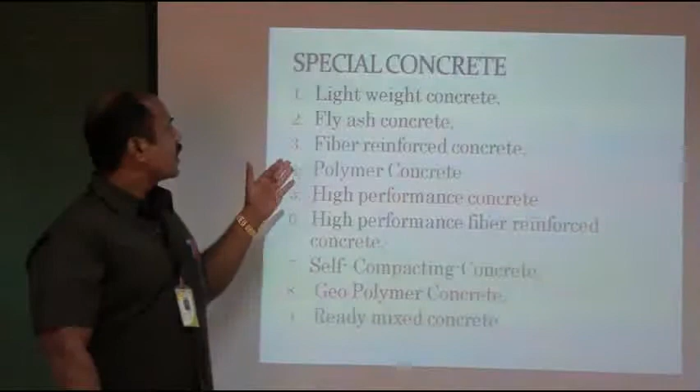For example, lightweight concrete. Second one is fly ash concrete. Third one is fiber reinforced concrete, polymer concrete, high performance concretes, high performance fiber reinforced concretes, self-compacting, geopolymer and ready mix concrete. So we are going to discuss one by one. So first one is lightweight concrete. The word itself is easy to understand.

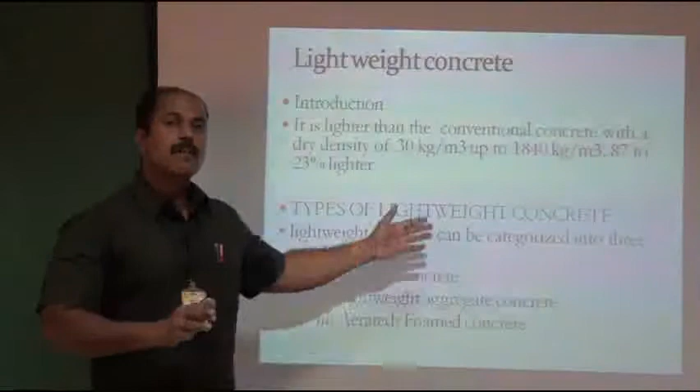How is the weight going to be reduced? There are three methods. First one is no fines concrete, second one is lightweight aggregate concrete, and third one is aerated and foamed concrete. So first one is no fines concrete. No fines means we are going to eliminate the fine aggregate of the concrete.

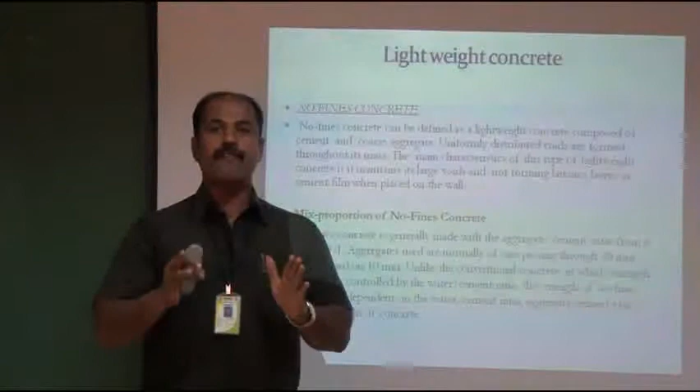Normally concrete is made by mixing coarse aggregate, fine aggregate, cement, fly ash or admixture and water. So we are eliminating the fine aggregate, only mixing coarse aggregate, cement, water with admixture. That is called no fines concrete. You see this example of no fines concrete. You see these honeycombs. There is no fine aggregate in this concrete.

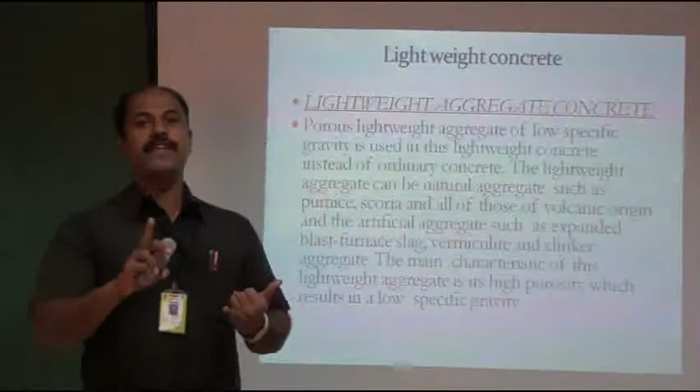So when we pour water, it easily infiltrates. That's the meaning of having no fine aggregate in this type of concrete. This is practically how no fines concrete is made. So in no fines concrete, what are the advantages and disadvantages compared to conventional concrete? First advantage is the self weight of the concrete will be reduced. Second one is the cost of the concrete will be reduced.

And what is the disadvantage? Infiltration. Infiltration means water easily infiltrates into the concrete. So how to avoid this disadvantage? Suppose we are making temporary floors or stages, we make them with no fines concrete. So the second lightweight concrete topic is lightweight aggregate concrete.

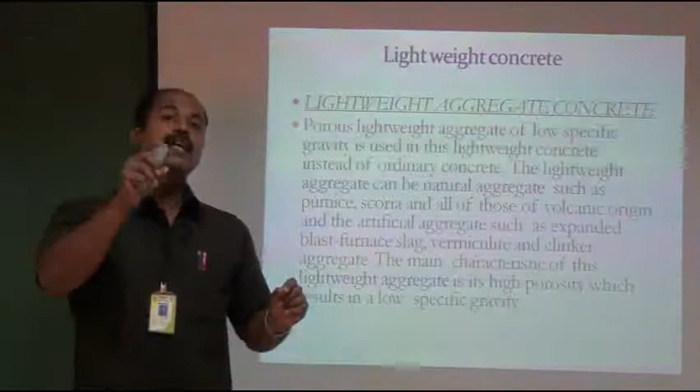Lightweight aggregate concrete means the aggregate we are going to reduce or sometimes replace. So what aggregate is going to be reduced or replaced? Particularly we concentrate on the coarse aggregate. What is the reason we replace or reduce the coarse aggregate? More than 45% of the weight of the concrete is taken by the coarse aggregate. That's why we reduce, replace or change the coarse aggregate.

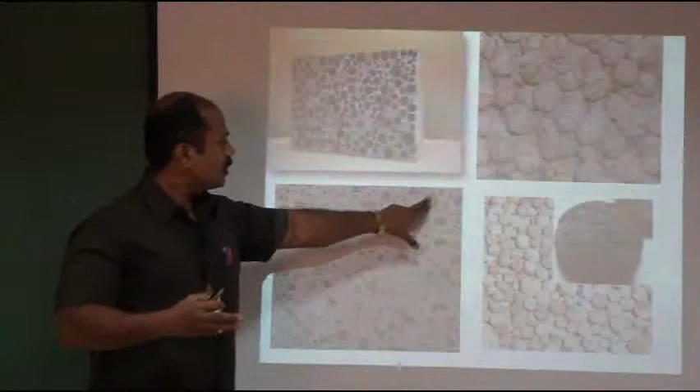In the market there are different coarse aggregates for sale, like thermocol or brick bats. These are the market-available lightweight aggregates, and they are used for making the concrete. If you cut the cross section of the concrete, it is easy to see. These particles are the lightweight particles used to make the concrete.

Third one is aerated concrete. For aerated concrete there are two types of aeration method. First one is induced aeration and second one is creation of the aeration. First we are going to discuss the meaning of creation of the aeration. Creation means to create air bubbles inside the concrete.

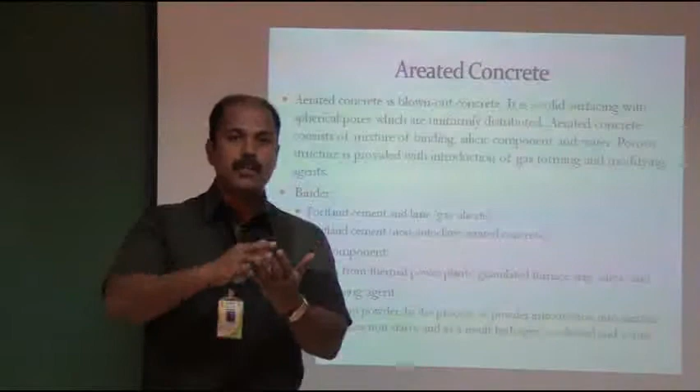How are they going to create them? For example, cement is mixed with aluminum powder. This process of mixing cement and aluminum powder generates air bubbles after 24 hours. You see this honeycomb structure. This is the creation of the air bubbles.

So this is the first step, they are going to cement with aluminum powder. They are going to shape it as required to fill up the mold. After 24 hours they are going to remove it and make the steam cure.

So aerated concrete, it is not possible to make a water cure. That's why we are going to use the steam cure.

So after the setting is over, this is the final structure of the aerated concrete. Another name for this is called floating concrete.

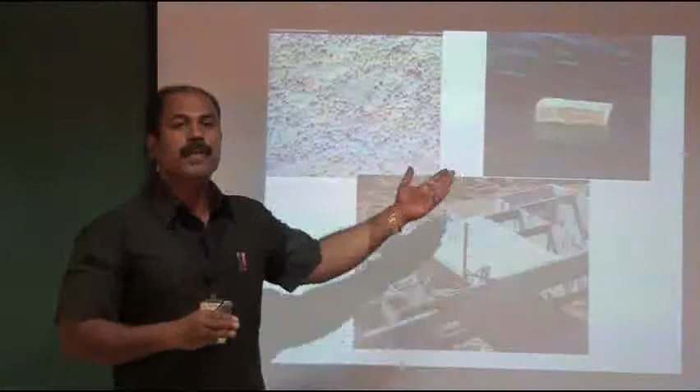What is the reason? The weight of the concrete is reduced by more than 85% compared to conventional concrete, so the weight may be 50 to 100 grams. That's why it's easy for the concrete to float. So the other name for aerated concrete is floating concrete.

So this precast aerated concrete is used for finishing the top structure of the building. For example, they use it for any structure to fill up the top structures.

Second one is foam concrete. Foam concrete means externally the foam is created and mixed with conventional concrete, by eliminating or reducing the coarse aggregate size. This is for the making of foam concrete.

Foam concrete means we are going to mix water and finally get cement and stable foam. The foam is created externally and mixed - this process is called foam concrete.

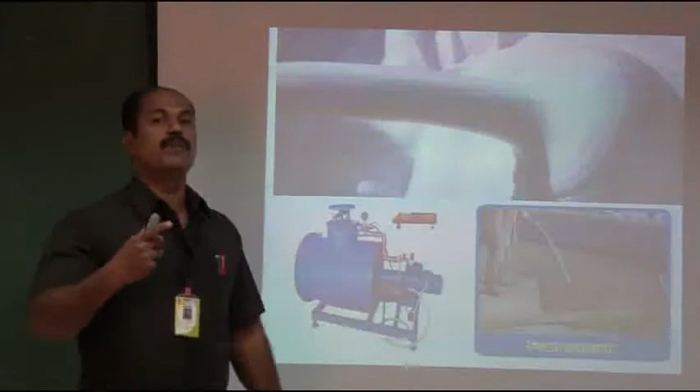So in foam concrete, this equipment generates the foam externally, and the foam is mixed in the mixture machine along with fine aggregate and cement to make the concrete. This is the final stage of foam concrete.

Next is a very important topic of special concrete: fly ash concrete. Already we have discussed lightweight concrete. The second topic is fly ash concrete.

Fly ash is a very important topic in the present scenario. The reason is that fly ash is one of the important environmental impacts throughout the world.

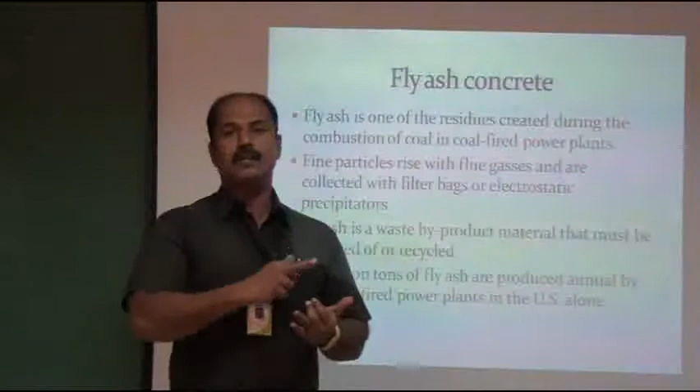So with this fly ash we are going to make concrete. For example, how is fly ash used in different scenarios? The concrete industry uses 46.4% of fly ash for reuse in concrete and cement.

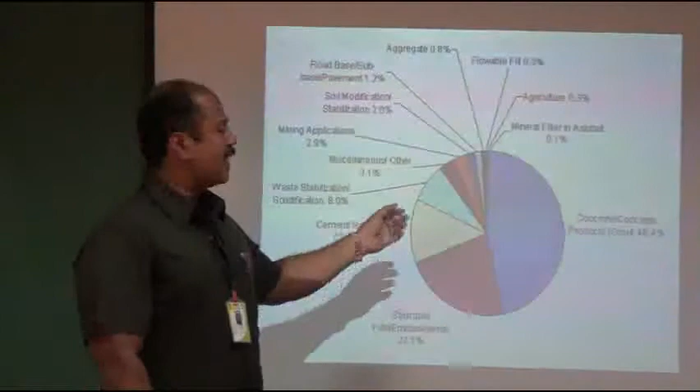Generally fly ash is of two types. What are the two types? Class C type and class F type. What's the meaning of class C and what's the meaning of class F?

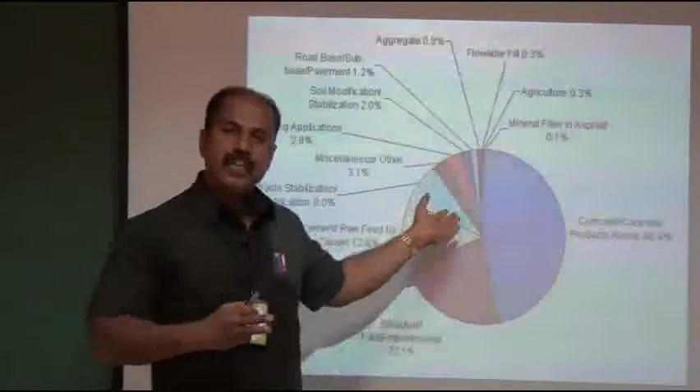Class C means the calcium content of the fly ash is more than 20%. In conventional cement the calcium content reaches 25 to 30%. So in this fly ash the calcium content is around 20%. That type of fly ash is called class C fly ash.

Class F means just the reverse of class C. What's the reverse? The calcium content is less than 20%. In terms of chemical ingredients, the fly ash with calcium content less than 20% is called class F fly ash.

Where are class C and class F available? Class C is available from the coal industry and sub-bituminous coal industry, and class F is available from thermal power stations. Next we are going to discuss how to make it and what ingredients we require for making fly ash concrete.

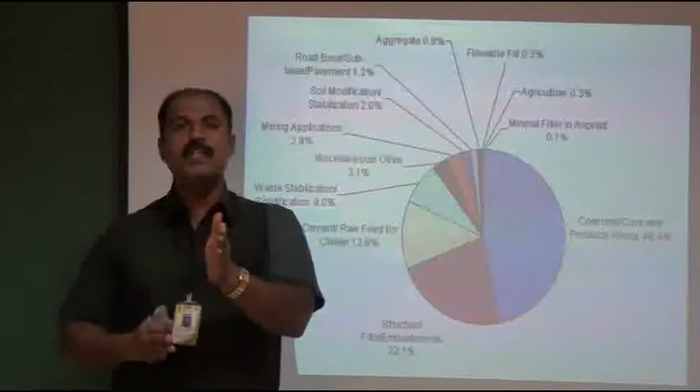So in conventional concrete, we add fly ash in different percentages - it may be a replacement, or it may even be an addition. So with class C and class F, currently up to 30% to 40% replacement of cement is possible for making the concrete.

So what is the advantage of fly ash concrete? First is that it is environmentally friendly. The reason is that fly ash is a disposable material used for landfill.

Normally all fly ash is used to fill up land. So we are avoiding this landfill by using it to make concrete instead. The second advantage is the cost of the concrete - the cost will be reduced by 10 to 20% compared to conventional concrete.

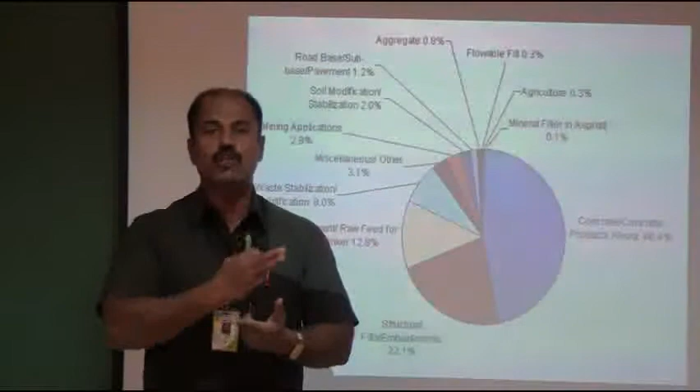The third important point is strength behavior and durability behavior. Strength and durability is higher than conventional concrete. The reason is that fly ash has more silicon content. The SiO2 content is nearly 60 to 80%.

That's why the strength and durability behavior is higher than conventional concrete. You can see how much fly ash is landfilled, and how enormous the amount of fly ash produced per day is for one industry. Think about how much fly ash is produced throughout the world.

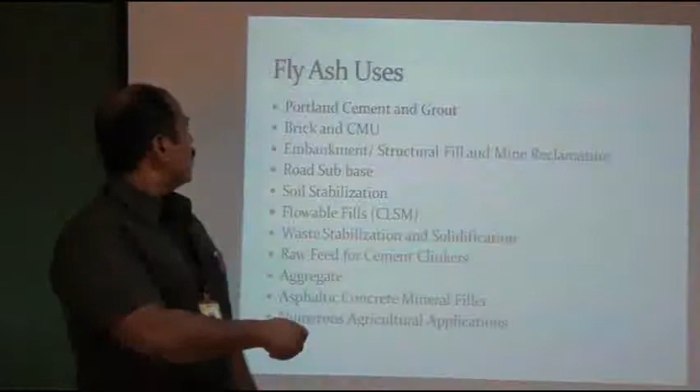So how do we compare class C and class F fly ash? Which one is better? For initial strength, class C is better than class F. This is because in class C, the calcium content is more than 20%.

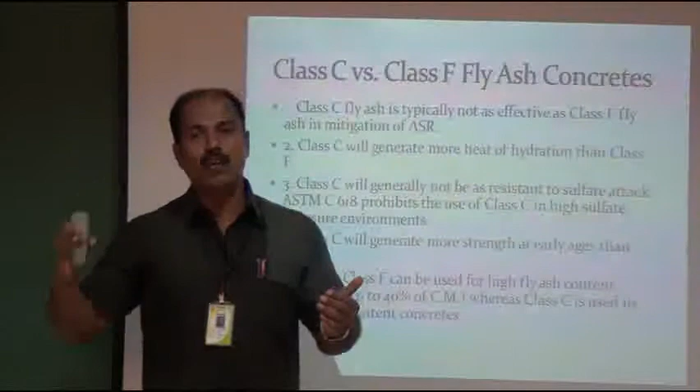But for longer duration strength and durability properties, class F is better than class C. Generally, class F fly ash is used for high volume fly ash, and class C fly ash is used for low volume fly ash. For environmental friendliness, it is normally recommended to use class F fly ash.

So the next important topic is self-compacting concrete. Self-compacting means the concrete automatically flows and compacts itself into congested areas of reinforcement, such as column joint reinforcement areas.

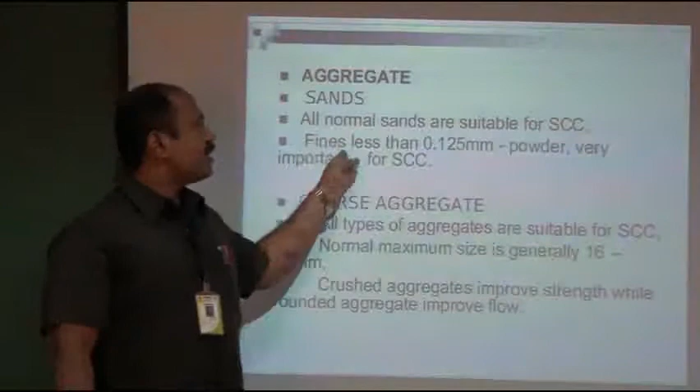What are the ingredients used for self-compacting concrete? Fineness of cement, coarse aggregate, fine aggregate, and then two types of admixtures are used: filling ability and viscosity enhancing agents. These two admixtures are used in mixing the concrete to make it self-compacting.

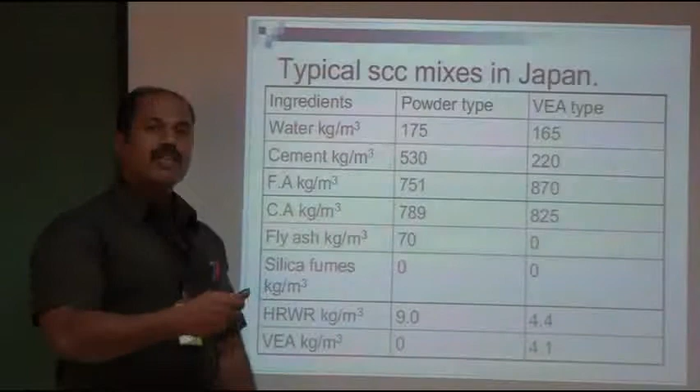There are two methods of making self-compacting concrete: the first is powder type, the second is VEA type, viscosity enhancing agent type. In this method, water is taken at 175 to 165 and cement at 530 to 220. In the VEA method, the cement content is reduced from 530 to 220.

For lightweight concrete, conventional testing methods are used, such as compressive strength, split tensile strength, and workability slump test. But for self-compacting concrete, the measurement of workability is entirely different, using slump flow test with T50 centimeters, J ring, V funnel, L box, V box, and fill box methods.

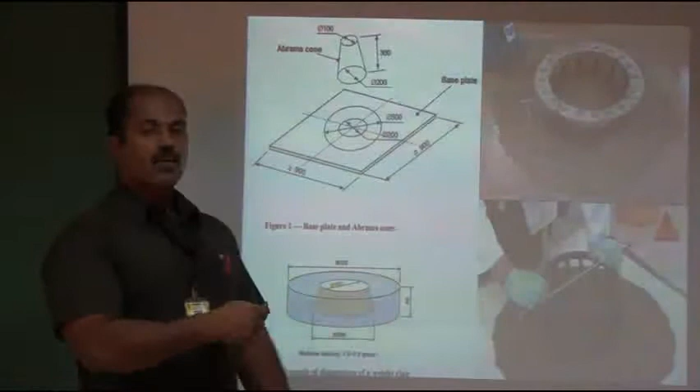The first method is measuring workability using T50. This involves filling the concrete and then removing it to see how it spreads out, measuring the spreading diameter, which indicates the workability.

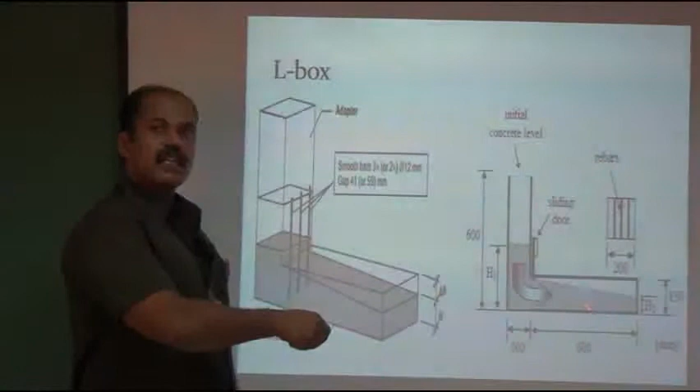The next method is the V funnel method, another way of measuring workability. Concrete is simply filled into the V funnel, and after filling is complete, the bottom screen is removed to observe how it flows.

The next method is the U box method, which is similar to the L box and V funnel methods. The concrete is filled in one section where a screen is provided.

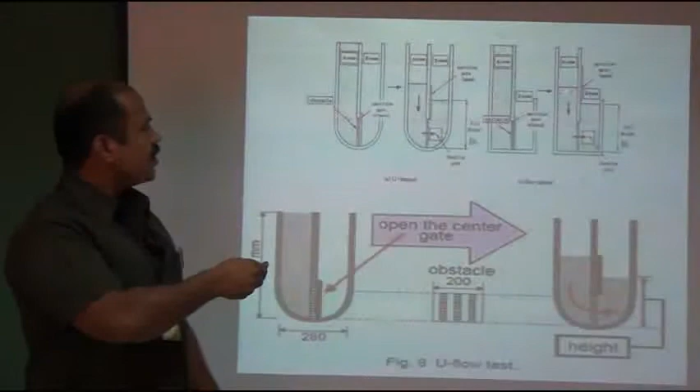So in practical, we are going to discuss 4 types of concrete. The first one is fly ash concrete, here is conventional concrete, and here is self-compacting concrete, and here is foam concrete. So it's easy to identify these in practical - fly ash, conventional, self-compacting concrete and foam concrete.

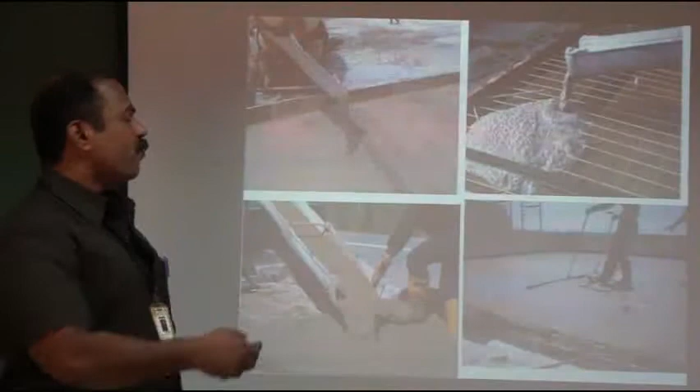So next, what are the testing methods already discussed. And what are the advantages of self-compacting concrete? Faster construction, reduction in site manpower, better surface finishes, easier placing, improved durability, and greater freedom to design - there is no particular design for making self-compacting concrete. That's why it's a greater freedom to design, and thinner concrete sections are possible because it's easy flowing into thinner members. That's why they can make thinner concrete sections and reduce the noise level, because without vibration we can finish the concrete without honeycombing.

So safer working environment. So the next important topic is geopolymer concrete. Geopolymer is the polymerization of conventional concrete to make the concrete.

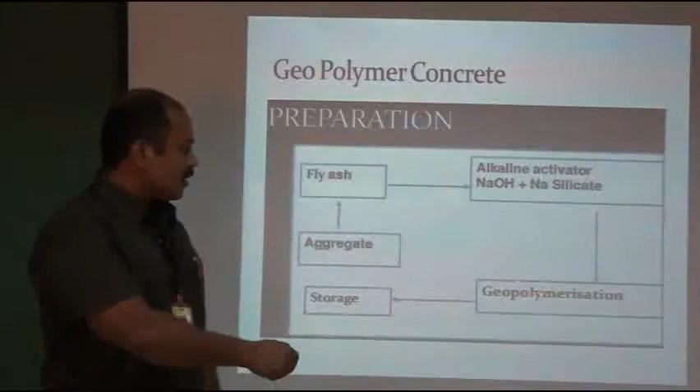What is the meaning of polymerization? First, the mixing procedure for polymerization: fly ash, aggregate, and then alkaline activator of NaOH and Na silicate, and geopolymer. This is the polymerization - we'll discuss later the meaning of polymerization. So this is the mixing procedure. In conventional concrete, we are not mixing NaOH and Na silicate. That is the difference between geopolymer and conventional concrete.

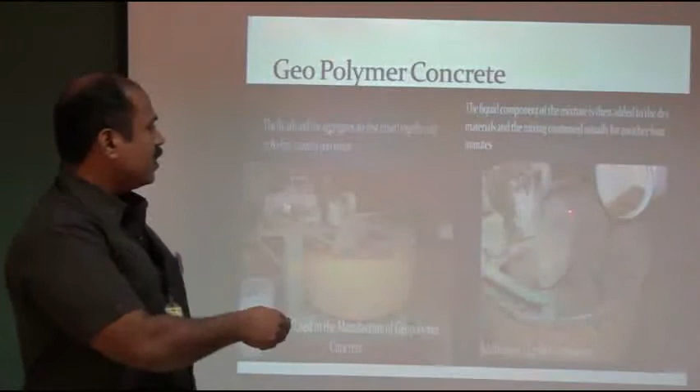For mixing geopolymer concrete: first water, second sand, gravel, KOH and NaOH. So which one is better? We are going to take any one of NaOH or KOH, and other materials like fly ash, silica fume and sodium silicate for the geopolymer. They are going to mix any one of these to make the concrete. So the mixing procedure: first water content, fine aggregate, coarse aggregate, NaOH and fly ash are mixed, and finally KOH is mixed.

The final step gives geopolymerization. After the geopolymerization, the concrete will get this nature. Check the slump - it's very good compared to conventional concrete. This is the making of the concrete. What's the advantage of geopolymer over conventional concrete? Before every special concrete, we discuss the difference between conventional and special concrete.

The geopolymer concrete is high strength concrete - we can achieve 110 MPa in 28 days. But in conventional concrete, as per the mix design, we reach only 40 or 50 MPa. This is very high strength concrete and its durability properties are much higher than conventional. What is the main disadvantage of geopolymer versus conventional concrete? The rate of the concrete - the chemicals, the availability of chemicals is higher cost than conventional concrete. That's the main disadvantage of geopolymer.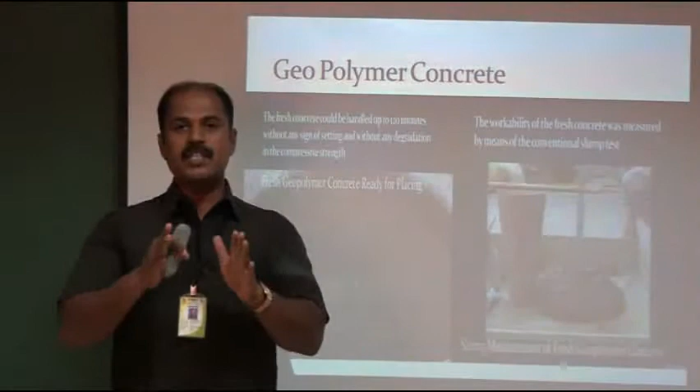Second, the polymerization - we make the mixing and polymerization, and only then can we fill up the concrete wherever required. But in conventional concrete, there's no need for polymerization. That's the main difference between geopolymer and conventional concrete.

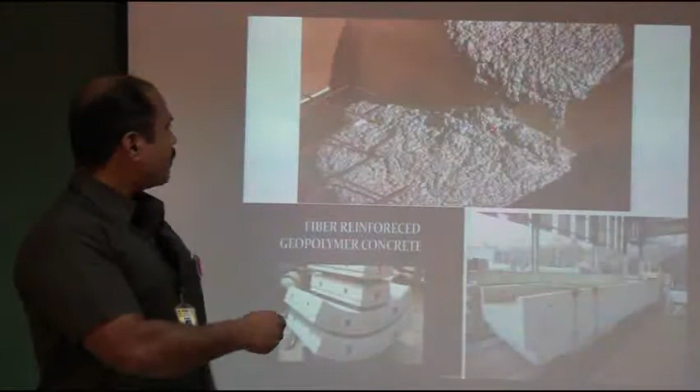These are the advantages - the compressive strength is about 1.5 times more than conventional concrete. This is the fresh geopolymer concrete, and after geopolymer we make precast elements like channel sections, railway sleepers, and electrical posts. These are the precast elements we make with geopolymer concrete.

So next one is fiber reinforcement concrete - another special type of concrete. Fiber reinforcement concrete means we are mixing some minute fibers into conventional concrete. That's the meaning of fiber reinforcement. So what's the need for fiber reinforcement? Normally concrete is very good in compressive strength but very weak in tensile strength. So some minute cracks will form after setting, during the plastic stage - reaching the plastic stage, some minute cracks will be formed.

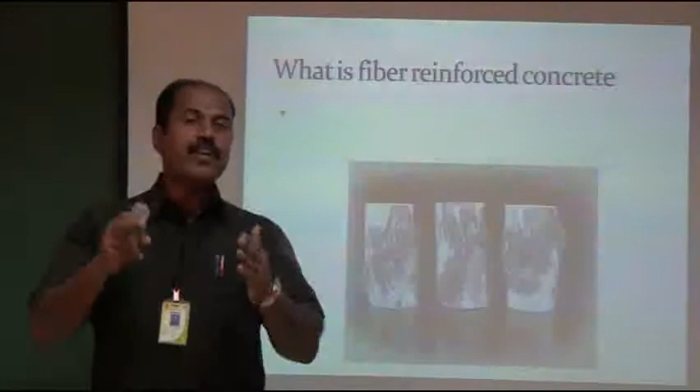So how to avoid this minute cracking? By mixing in some fibers. In the market there are different types of fibers available. You see this one: glass fibers, wood fibers, natural mineral fibers, asbestos fibers, cotton fibers, bamboo fibers and bituminous fibers. So there are different types of fibers available.

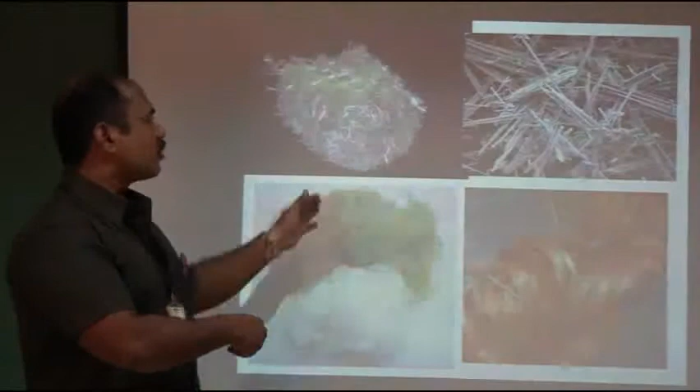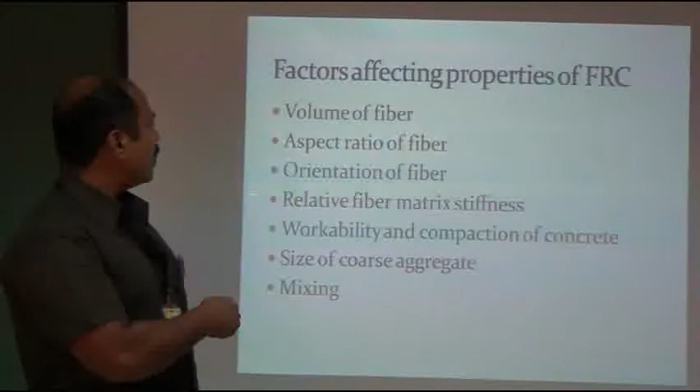Next, the important factors for the properties of fiber reinforced concrete: volume of fiber, aspect ratio of the fiber, orientation, relative fiber matrix, workability, size of coarse aggregate and mixing. These are the properties affecting your fiber reinforcement. First one is the volume of fiber. Suppose we mix fiber in concrete, how much volume do we need? Suppose we add 2 kg, 3 kg, it is very difficult for the workability characteristics. That's why they recommend 0.2 to 0.35% of total volume of the concrete for mixing. That avoids honeycombing, segregation and bleeding of the concrete.

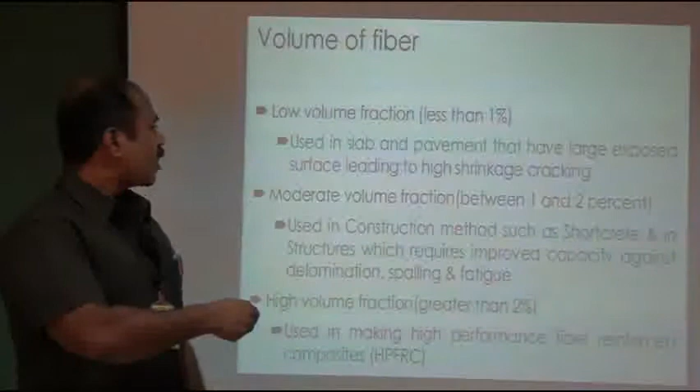So see this one: low volume fiber fraction means less than 1%, moderate means 1 to 2%, and high volume means greater than 2%. It should not be more than 5%. The reason is that beyond this 5% limit it affects the workability characteristics.

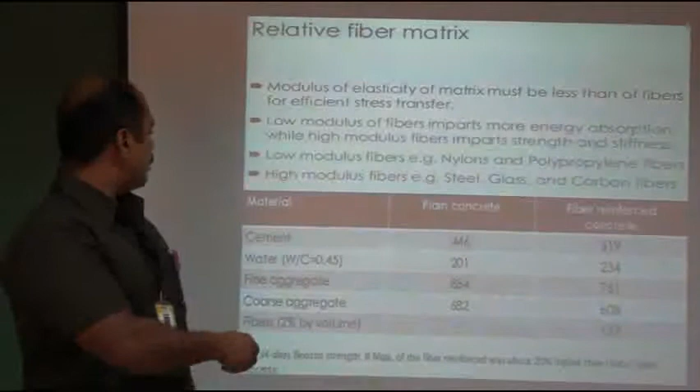Next is relative fiber matrix for the cement content. We take 519 for fiber reinforced concrete and 446 kg per m cube for plain concrete. Those are the ingredients for making fiber reinforced concrete and plain concrete. For water cement ratio they take 0.45. In fiber reinforced concrete they take 234. That is the difference between plain concrete and fiber reinforced concrete.

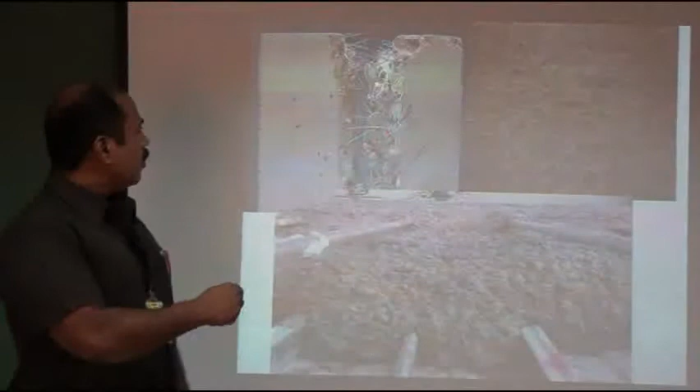So see this one, how the fiber is mixed in the concrete. After breaking the concrete, how the fiber is spread uniformly throughout the concrete. You see the surface of the concrete with fibers in the plastic, fresh stage, how the fibers are oriented. The orientation of fiber is very important for the tensile characteristic. Suppose all fibers are in horizontal position, the tensile characteristic is higher than conventional concrete. So orientation of fiber is another important characteristic for making fiber reinforced concrete.

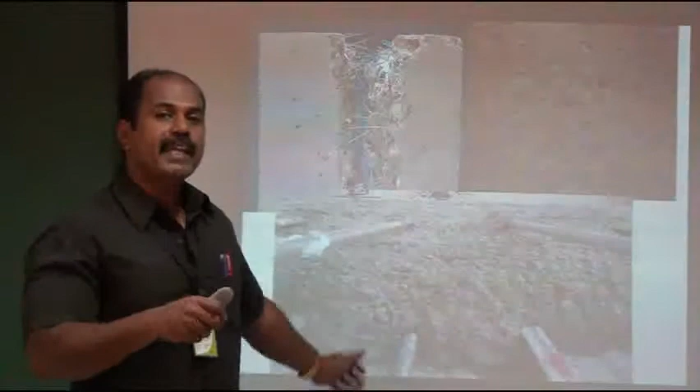So next one is high performance concrete. High performance concrete is used nowadays for bridge structures, slabs, and huge structures where the span length is more than 30 meters or 50 meters. We recommend high performance concrete for these.

What is the meaning of high performance? How does it differ from conventional concrete? High performance concrete means performance. Which performance? Workability, strength and durability. Concrete that improves in these three performances is called high performance concrete.

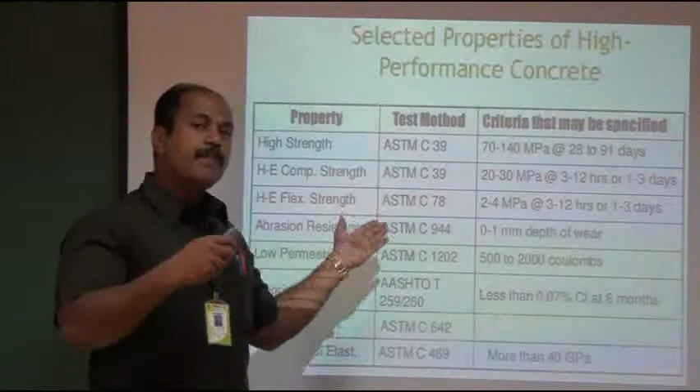So what is the strength behavior of high performance concrete? We get 70 to 140 MPa at 28 days to 91 days. In conventional concrete, it is not possible to reach this much strength. In conventional concrete, 70 is maximum, but high performance concrete reaches up to 140. That is the main difference between conventional and high performance concrete.

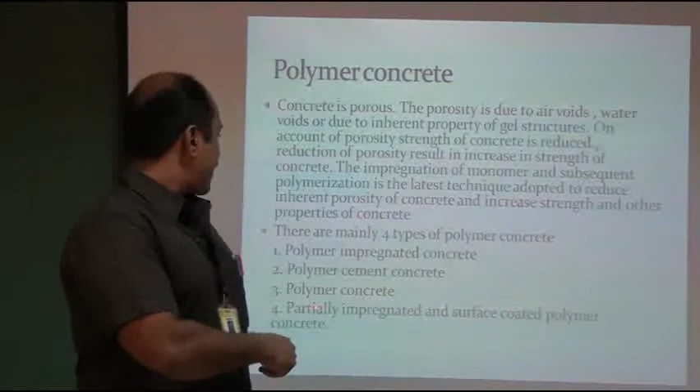Next one is important, polymer concrete. Before we discuss polymer concrete, note how geopolymer and polymer differ. There are four types of polymer concrete. First one is polymer impregnated concrete. Second one is polymer cement concrete. Third one is polymer concrete. And fourth one is partially impregnated and surface coated polymer concrete. So we are going to discuss them one by one.

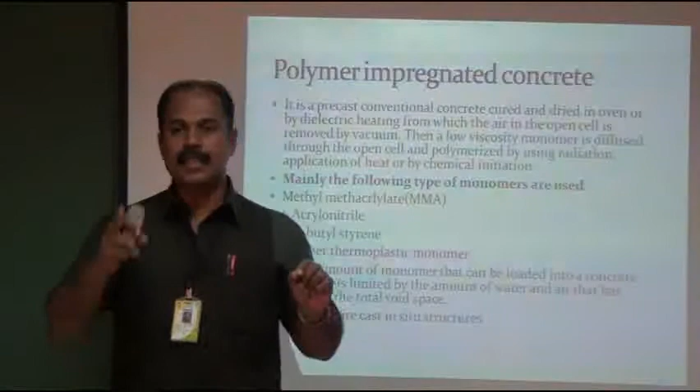How? The polymer acts as a fill-up agent, infiltrating the cracks. Suppose there are cracks or honeycombs on the surface of the concrete; the polymer fills them up to increase the strength. That is called polymer impregnated concrete. You see this one, this is polymer impregnated concrete. And next one is polymer cement concrete.

Polymer cement concrete means cement concrete, as we know, with polymer mixed in extra to the conventional concrete. What is the extra? Different types of polymers: polyester styrene, epoxy styrene and furan. These polymers are available in the market and are mixed into conventional concrete. What is the percentage? As per the design, 2 to 3% polymer is mixed into conventional concrete, and it is placed in the required shape. That is called polymer cement concrete.

So this is polymer cement concrete. After placing the polymer cement concrete, they check the fineness and surface area, which differ from the conventional one.

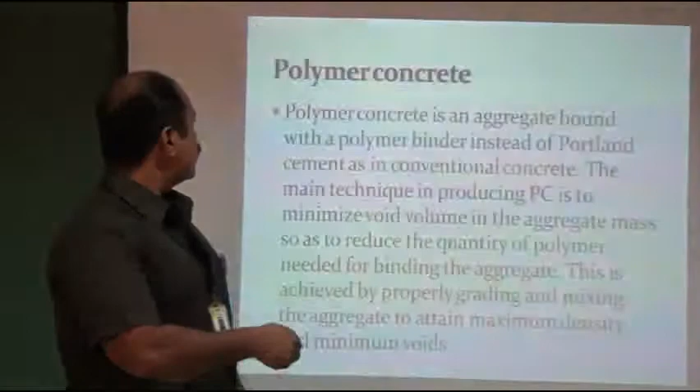Next one is polymer concrete. Polymer concrete means there is no cement. Polymer is the binding agent. Polymer, coarse aggregate, fine aggregate and water are mixed to make the concrete. In polymer cement concrete, cement is mixed and polymer is added extra to conventional concrete. But polymer concrete needs no cement; polymer is the binding agent for the coarse and fine aggregate. So this is polymer concrete.

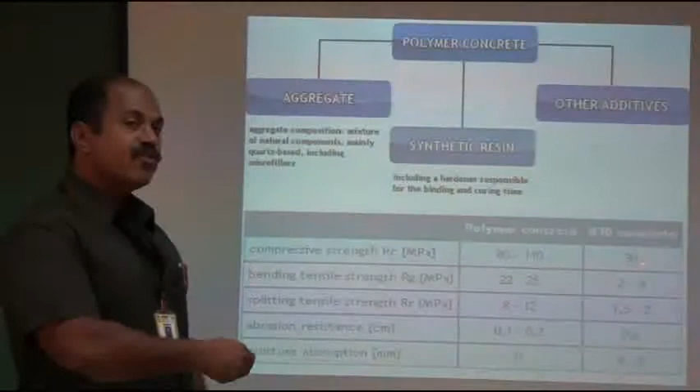What is the compressive strength? This is a very important one. For polymer concrete we get 80 to 110 MPa, but in conventional concrete of M30 grade we achieve only 30. How do they differ, 80 versus 30? That's the main advantage of polymer concrete over conventional concrete.

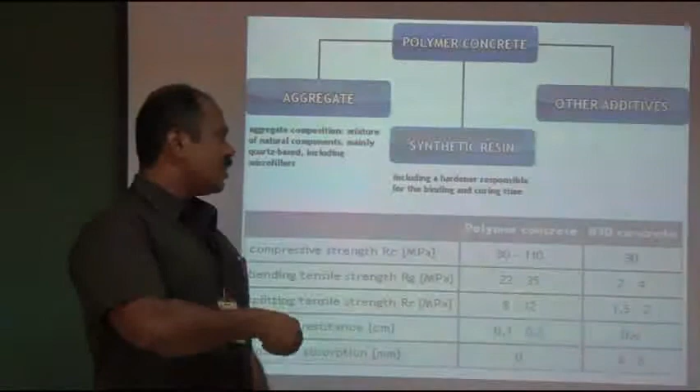So this is the main advantage and comparison of your conventional to your polymer concretes. So this is for the polymerization. Polymerization means which concrete is a polymer concrete. Polymer concrete means coarse aggregate, fine aggregate and polymer mixed to make the concrete.

Here for the surface coated. Next one is polymer impregnated and surface coated. Impregnated means they are going to immerse in the polymer solution. After the immersion, they are going to apply the polymer on the surface. Two processes are involved for the polymer impregnated and surface coated concretes. So this is how they are going to surface coat.

After the concrete is over, spraying of the polymer on the surface, the entire surface, to fill up with polymer. Here the beam section, they are going to apply the brush for the surface coating of the concrete. Here for the structure, they are going to spread the polymers. So this is practically how to apply and surface coat your polymer sections. So this entire structure they are using for the polymer structure.

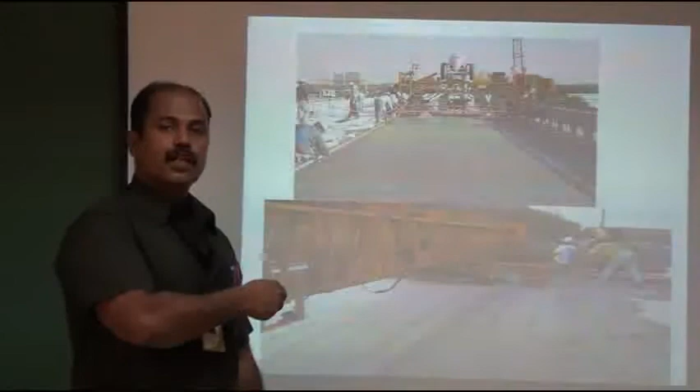Here practically they are going to use it for the road pavement. For pavement roads they are going to use the polymer cement concrete. This is the finishing structure of the polymer cement concretes, and this entire structure they are going to use the polymer sheet. Afterwards we are going to see what are the tests available.

So before, we discussed special concrete. So what's the meaning of special concrete? What's the difference between conventional concrete and special concrete? How do they differ from your conventional characteristics? Everything we discussed. So in general, what are the tests available for the properties of your concrete? Maybe strength properties or fresh concrete properties or hardened concrete properties.

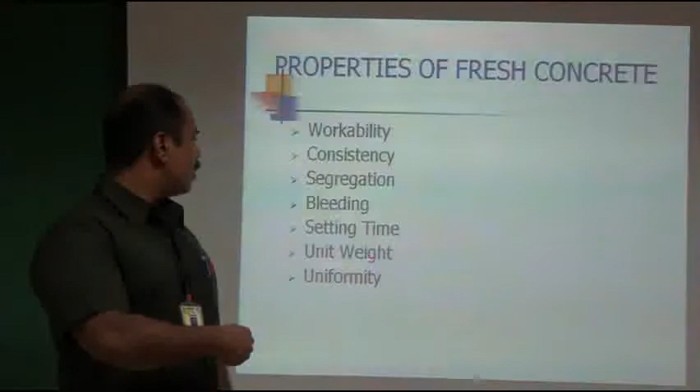So there are two stages of concrete that we generally know: the fresh concrete stage and the hardened concrete stage. So what are the properties of your fresh concrete? First one is workability, second one is consistency, third one is segregation, bleeding, setting time, unit weight and uniformity. These are the properties to check for your fresh concrete stage. In hardened concrete we are going to check the strength behaviour, corrosion behaviour, durability behaviour and some other properties.

So first, in the property of your fresh concrete, we are going to check the concrete consistency. Concrete consistency means we are checking the workability of the concrete using the different methods of workability testing. So first one is slump cone test. Practically for all types of concrete we check the slump measurement. Other tests available are compaction factor, flow table, VB consistometer, Kelly ball test, and VB impression testing machine. So there are different types of measurement available.

The slump cone is generally used practically in all types of sites for checking the concrete. Suppose in special concrete, like fiber reinforced concrete, we are checking the workability, it is not possible to check your slump. So in fiber reinforced concrete we check with the VB consistometer and flow table, which are suitable for your special concrete. Suppose your compaction factor is more than 0.9, it means very good compaction. Less than 0.9 is medium or low. That is the Indian standard recommendation of the compaction factor test.

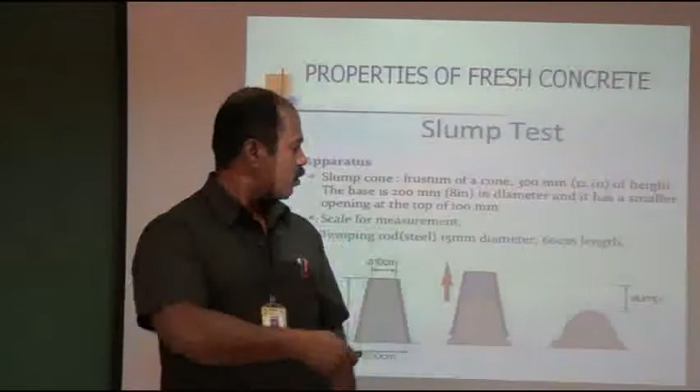So first one is the slump cone. Generally we know this slump cone. Height is 30 cm, top diameter is 10 cm and bottom diameter is 20 cm. Fill up the concrete in 3 stages. In the first stage, fill up with uniform compaction of 25 blows. Then we fill the second and third. After the fill up is over, gently remove the cone upwards. When you remove it upwards, your concrete spreads according to the nature of your water content mixing.

So your original height is 30 cm. The difference between the height of your concrete and the original height is the slump value of your concrete. So you see this one, there are 3 types of slump: collapse, shear and true slump. Naturally for all slump we consider these 3 types of slump.

So collapse in conventional concrete means the water ratio is more than 0.5, so it is going to collapse. Collapse means the entire spreading of your flow. That is for the collapse. Shear means it goes to one side, the concrete slides. That is called the shear failure of the concrete. Here, the true slump is your original height to your concrete height. That is the original slump of the concrete.

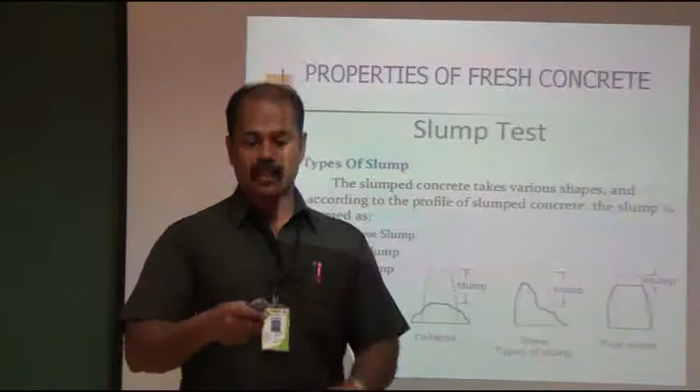So this is the slump value as per the Indian standards. Very low slump is the range of 0 to 25 mm, for a compaction factor of 0.78. Low slump is 25 to 50, medium slump is 50 to 100, and high slump is 100 to 175. That is the cone height to the final height of your concrete. That is called the slump of the concrete.

So next one is the flow test. Flow test means flow table. On the flow table, before placing the concrete, we measure the spreading diameter in different directions. After filling, they remove the flow cone and jolt it 15 times, so the concrete spreads uniformly throughout the table, then measure the diameter. The diameter minus 25 divided by 25 gives the flow percentage. That is the flow test.

So next one is the flow test formula: the diameter of the flow minus 25, divided by 25, into 100. What is the measure of your consistency? Flow percentage 0 to 20 means dry, 20 to 60 means stiff, and 60 to 100 means plastic, wet and sloppy. Sloppy means more than 120 to 150. That is the special concrete, self-compacting concrete. You get 120 to 150 for it.

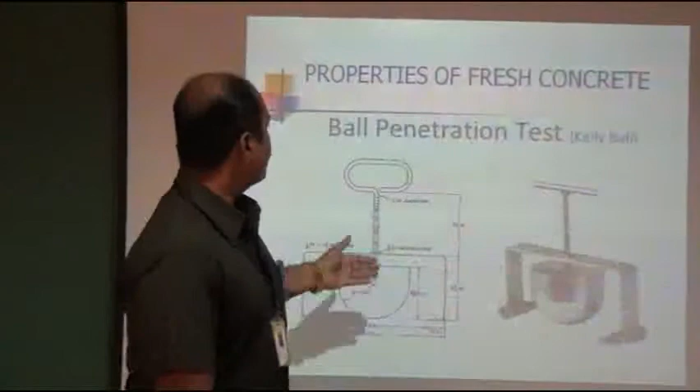So next one is the Kelly ball test. This is another test method to measure the workability of the concrete. Next one is the ball penetration test. In the ball penetration test, they simply penetrate the fresh concrete. Suppose the concrete is placed in a slab. They press the ball into the surface of the concrete. How does it penetrate? How much depth does it penetrate? According to the depth of penetration, they measure the workability of the concrete.

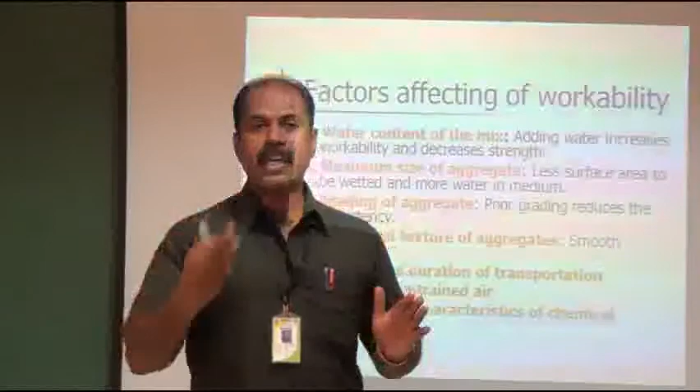So what are the factors affecting the workability of the concrete? First is the water content of the mix. Second is maximum size of aggregate, grading of aggregate, shape and texture of aggregate, method and duration of transport, amount of entrained air, and quantity and characteristics of chemical admixtures. First one is water content. That is a very important characteristic governing workability. More water content means the spreading diameter is more. But strength behaves inversely to water content: more water means strength will reduce.

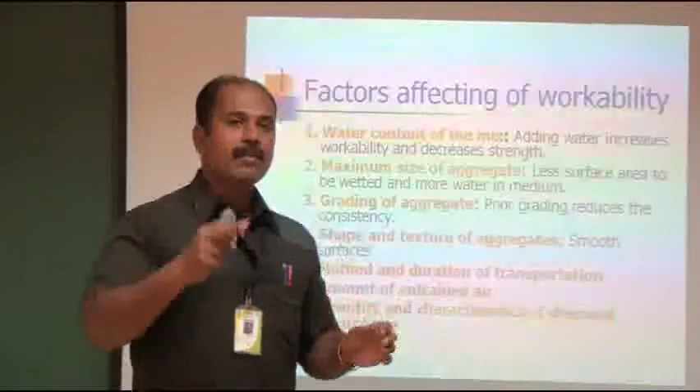Second one is maximum size of aggregate. If the size of aggregate is more than 25, the workability will be affected. The size of aggregate good for workability and strength is the range of 12 to 20 mm. 12 mm to 20 mm is suitable for high strength concrete and good workability. Next one is grading of the aggregate, which means separating the sizes of aggregate. Suppose maximum is 20 mm and minimum is 10 mm; grading means we split into 10 mm, 12 mm and 20 mm. This grading is very good for workability.

Next one is shape and texture. That's an important characteristic of workability. The shape of the aggregate affects the workability. Which shape? Rounded aggregate is more workable compared to irregular and angular aggregate. Angular aggregate is less workable, but in strength, rounded is lesser than angular aggregate. That is the strength behavior.

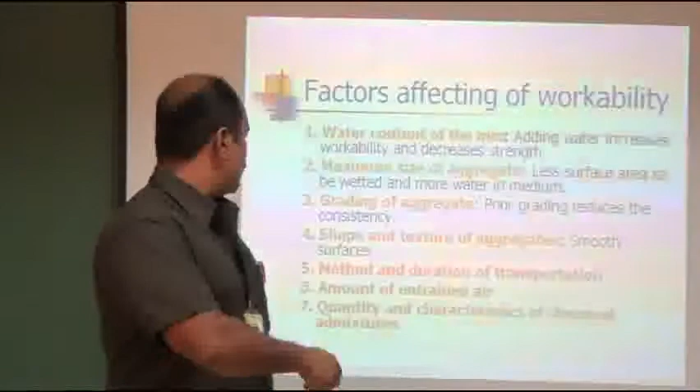Next one is method and duration of transport. That affects segregation and bleeding of the concrete. Suppose the concrete is made in one place and placed some distance away, beyond 100 to 200 meters, transported from mixing to placing. The concrete is automatically jolted, and segregation and bleeding occur easily. That's why the method and duration of transport is very important. So next one is measurement of workability by the compaction factor, the next method for workability.

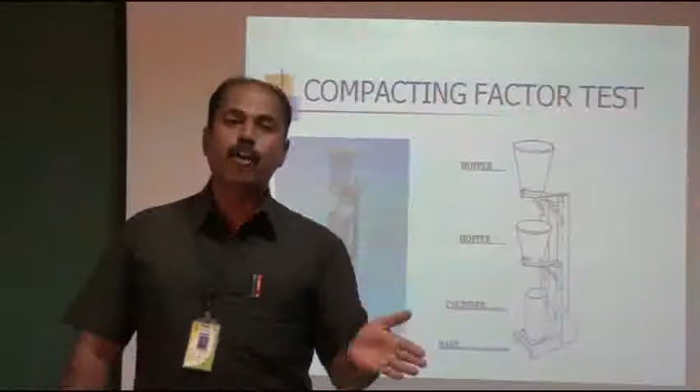First one is the slump method. Second one is the flow table method, and third one is compaction factor. In compaction factor, there are two hoppers. Fill up this hopper entirely in 3 stages to the top surface, open the bottom door freely to fill up the second hopper, and then open here to fill up your mold. Then we take the weight. Level it and weigh it; that is called the partial compaction of the concrete.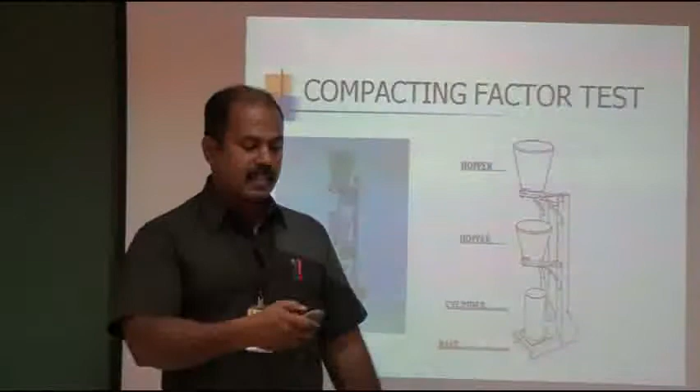Second stage, fill this cone with concrete in 3 stages. First stage, fill up the concrete up to this level and give 25 blows. Second, here give 25 blows, and at the top fill up the concrete and do the same. The weight difference between partial compaction and full compaction measures the compaction factor of the concrete. So this is the testing procedure for the compaction factor of the concrete.

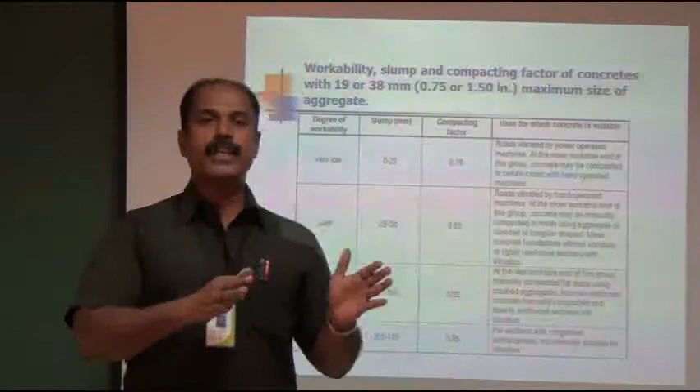How they test it from the first hopper to the second hopper, and here is, as per the Indian standard, what value is required for the compaction factor. Very low means 0.78, low compaction factor is 0.85, medium is 0.92, and high compaction factor is 0.95. It is very useful for measuring and making your mix design. Suppose M20 grade, M30 grade, M35 grade mix design, we need the compaction factor value.

Here is the Vee-Bee consistometer, another method of testing the workability of the concrete. This method is suitable for some special concretes, for example fiber reinforced concrete. So this is the Vee-Bee consistometer. It is the same method as the slump cone. Place the slump cone in this Vee-Bee equipment and fill the concrete in 3 stages, each stage 25 blows of the tamping rod, and finish the top level of the concrete.

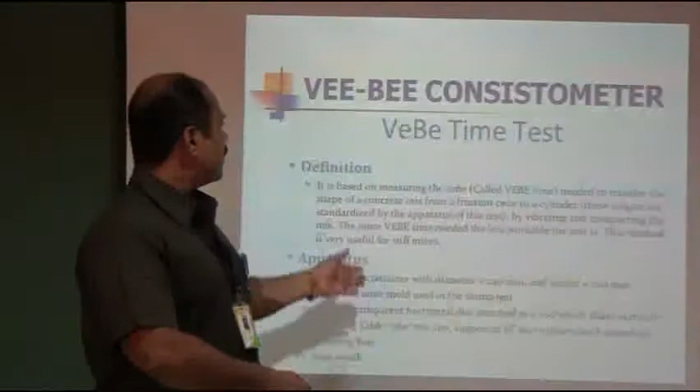Gently remove the cone so the concrete spreads, then apply vibration and note the time taken for the flow of the concrete. That time is used to measure consistency and placing of the concrete. Another thing: there are two important properties of fresh concrete, segregation and bleeding. They are so important to take care of because they greatly affect two properties: strength and durability.

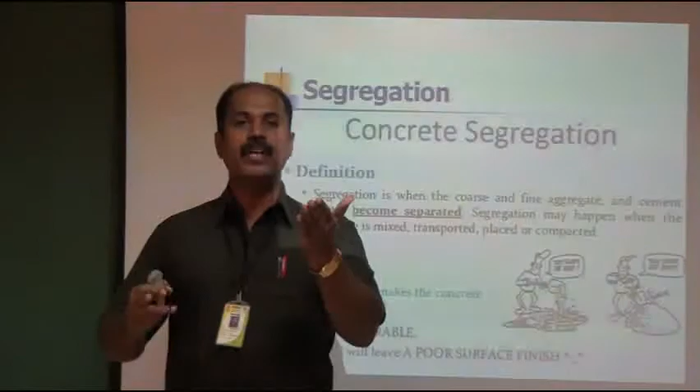What is the meaning of segregation? Segregation means separation of the coarse aggregate from the cement slurry. After over vibration or long transport, the coarse aggregate will be separated from the fine and cement slurry. So how to avoid segregation and what factors affect segregation, we are going to discuss. First, the concrete being too wet or too dry creates segregation. Second is the selection of the aggregate, maximum size or minimum size aggregate, which affects segregation.

Third one is the transporting of the concrete. Suppose we mix the concrete in one place and place it somewhere else; beyond 100 meters, segregation will occur. And fourth one is over vibration. Beyond the vibration limit, segregation happens. So those are the reasons segregation occurs. You see this one, practically making a column with over vibration: the coarse aggregate is separated here and the cement slurry is separated here. That's the reason for segregation.

Second one is the bleeding concept. Practically, you see here how the coarse aggregate separates due to over vibration. Next is bleeding, another concept of fresh concrete. Bleeding means excess water collecting on the top surface of the concrete. Segregation means separation of the coarse aggregate from the concrete, but bleeding means water rising to the top surface of the concrete. That is called bleeding. So what are the reasons bleeding occurs?

First one is a high water cement ratio. Suppose it's beyond the Indian standard limit or beyond the mix design limit, water will rise to the top surface of the concrete. Second reason is improper vibration and improper mixing of the concrete. The concrete should be mixed with fine, coarse aggregate, water and cement.

Proper mixing means the repellent of water will be eliminated. Improper mixing means the ingredients are not properly combined when placing the concrete, so the water will be repellent to the top surface. That's the reason for the bleeding of the concrete.

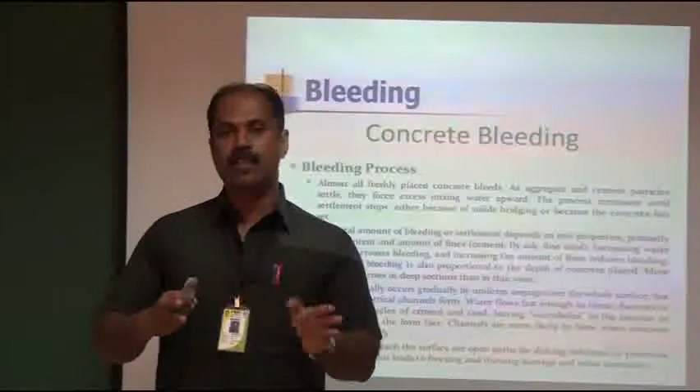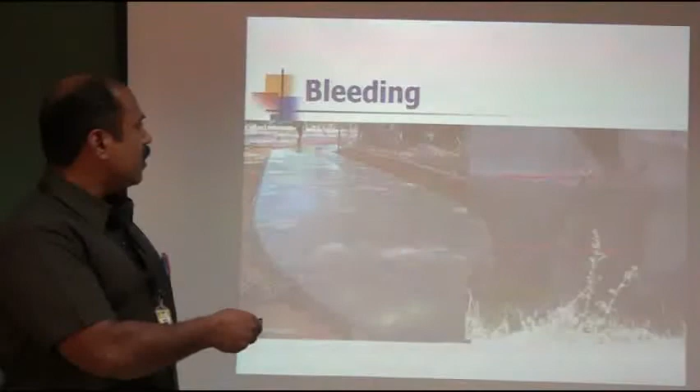You see this one practically, how the water will be repellent in the top surface of the concrete, due to excess water cement ratio, or over vibration, or third, improper mixing of the concrete. The cement, slurry and water will be repellent to the top surface of the concrete.

So the next one is the hardened stage. Before this we discussed the properties of the fresh stage; now the hardened stage. Here we discuss strength, modulus of elasticity, durability, creep and shrinkage, and water tightness. These are the strength tests available to measure the hardened stage. Hardened stage means after the final setting time is over, we check for strength property.

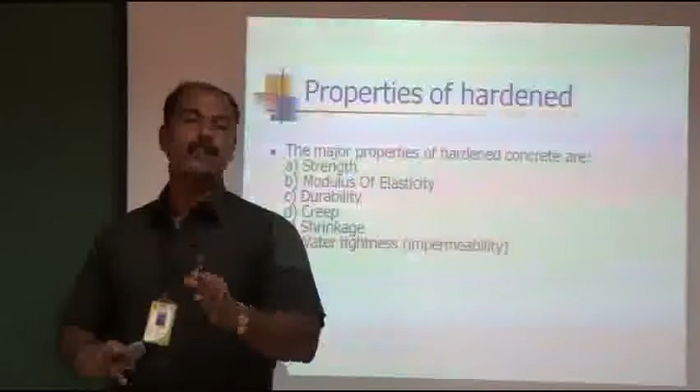Strength property means there are three strength properties we check: first is compressive strength, second is split tensile strength, and third is flexure. The first, compressive strength, is based on the strength behavior of concrete. For example, after mixing concrete in M20 grade, after 28 days it should not be less than 20 Newton per mm square. That is the Indian standard specification for compressive strength of M20 grade.

What is split tensile and flexure? Split tensile means indirect tension test of concrete. We make a concrete cylinder, put it in horizontal direction, and apply compression to split it into two. That is called split tensile. Flexure means we make a concrete prism and apply a single point load or two-point load to measure the deflection. That is the split tensile and flexure strength of concrete.

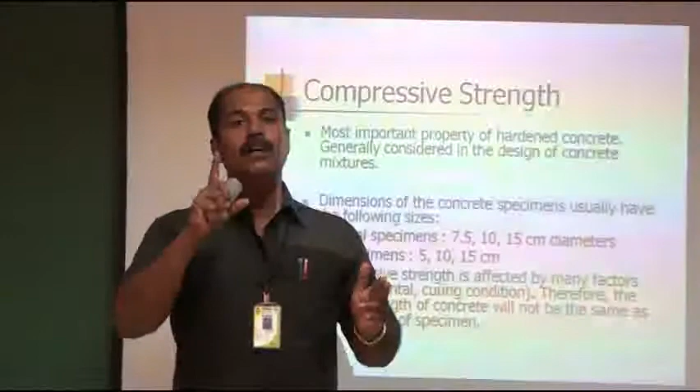The Indian standard specification for flexure and split tensile is that it should not be less than one third of the original grade of the concrete. Suppose in M20, the flexure should not be less than 7 Newton per mm square. That is the Indian standard specification for flexure and compressive strength of concrete.

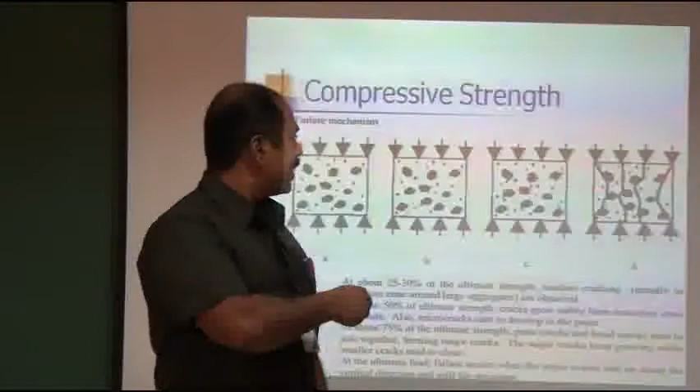So how do we make the compression test? We make the cube as per Indian standard, 150 by 150, and apply compression; the crack will form. First the crack starts at the joining of the coarse aggregate and fine aggregate mortar. Then the crack slightly enlarges to reach the next aggregate. Finally the crack reaches from top to bottom surface, and it is easy to split the concrete. That is the procedure.

Next is the split tensile strength test. As mentioned, this is for the cylinder, put in horizontal direction, to apply load to split it into two parts. For flexure in practice, this is for the prism, to apply a two-point load to check the crack pattern from the point load to the supports.

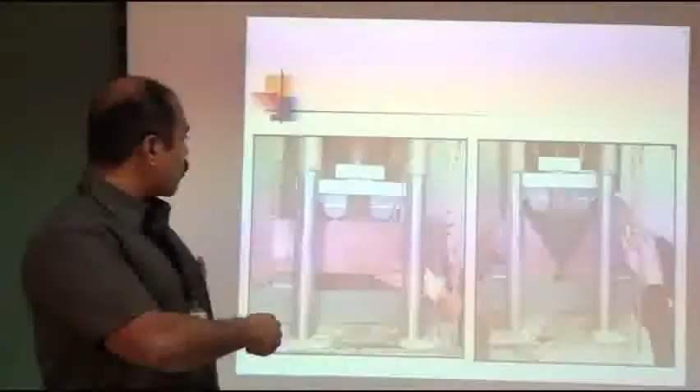You see this one practically, the beam is supported on two points load. After applying the load, it easily breaks at the center point; we measure the applied load over the surface area to know the flexural strength. These are the factors affecting the strength behavior of the concrete.

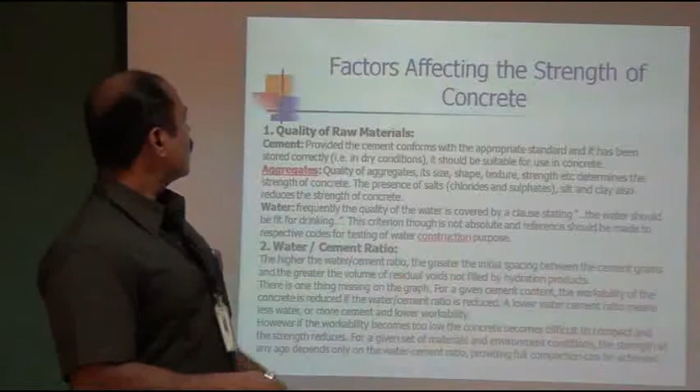First, it depends on the test type, the size of the specimen, and its relation with the size of the aggregate. These properties depend upon the test type of the concrete, and other than test type: type of cement, type of aggregate, degree of compaction, mix proportion, and mixing grade. Other factors are the quality of raw material, coarse and fine aggregate selection, water cement ratio, and finally age of aggregate and compaction factor. These are the properties affecting the strength behavior of the concrete in the hardened stage.